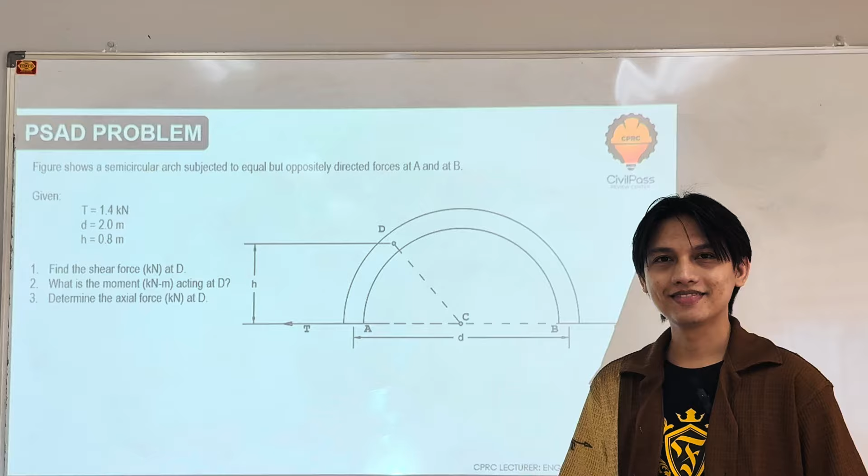PSAD naman. So, meron tayo ditong problem. I-solve ko muna to using the conventional and then sa huli, solve ko ng shortcut. So, hintayin nyo. Okay? So, basahin natin.

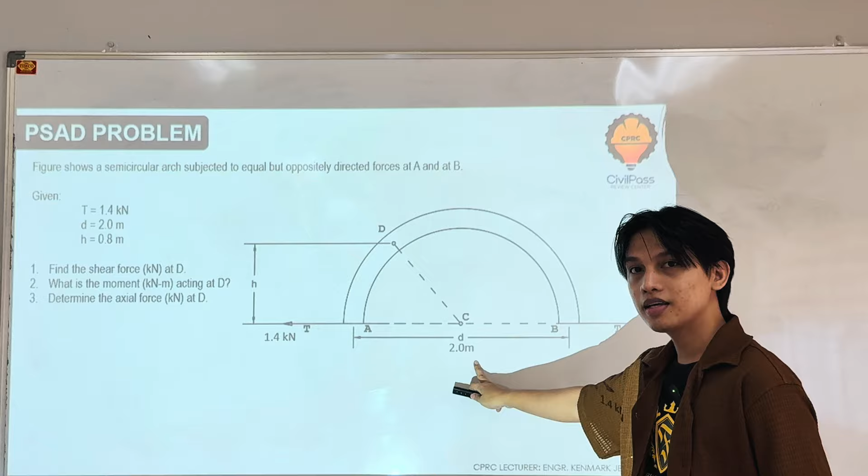May circular arc daw tayo which is subjected to equal but opposite force at point A and B. And given yung value ng force na yon, 1.4. Given din sa atin yung diameter ng ating semicircle, ilapag natin. Then given din tayo ng h, which is this one. And kung babasahin natin yung mga tanong, hinahanap sa atin yung shear force, moment, and axial at point D.

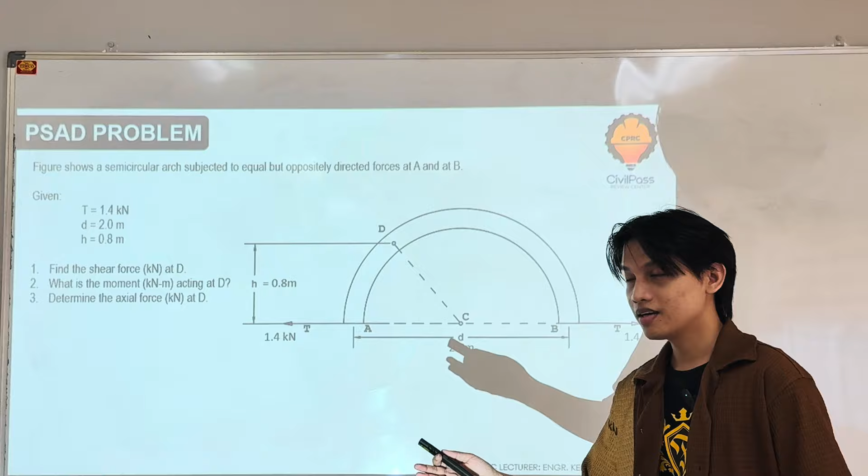So ito yung point D, ano? Ngayon, paano natin isosolve yan? So, these are internal forces. Para ma-solve natin yung internal forces, una natin kailangan gawin is palabasin yung mga internal forces na yan. Okay, kasi initially, hindi natin nakikita yung mga yan dito, no? So, para palabasin yan, we need to cut.

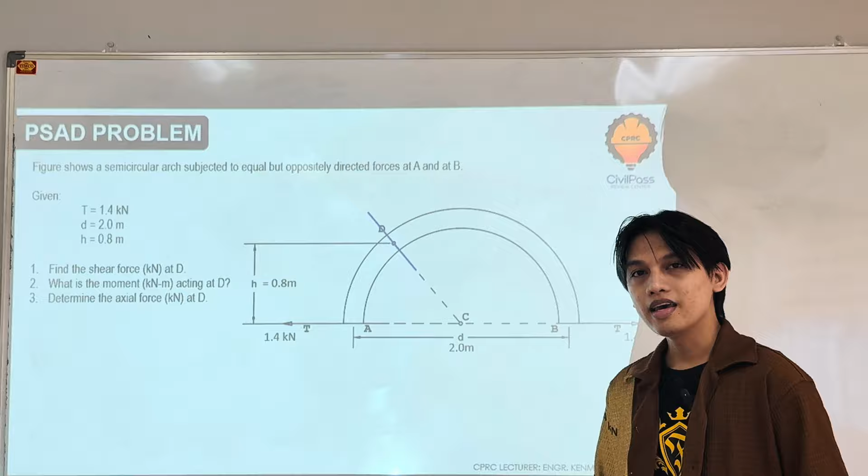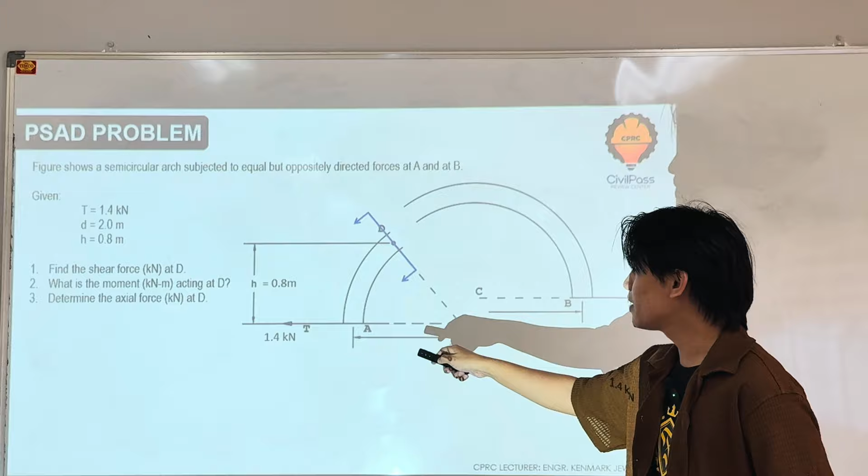Okay? So, we are going to cut at point D and tandaan, kapag nagka-cut tayo, dapat parallel doon sa cross-section. Parang ganyan. Okay? And then, dahil kinat natin yan, mahati yan into left and right part. Then, pipili na lang tayo dito kung ano yung magandang i-analyze. In this case, i-analyze ko na lang itong left part kasi mas mukha siyang simple and kompleto yung data niya compared sa right side. Okay, so focus tayo dito.

Ngayon, dahil nag-cut tayo, merong lalabas na internal forces dyan. Okay? And para ma-drawing yon, gawa tayo ng free body diagram. And take note, when we do the free body diagram, may dalawang way yan. It's either the method of assumption or method of correct sense. When we say method of assumption, ang gagawin mo dyan is mag-assume ka lang ng direction ng forces. Pero para sa akin, mas maganda yung method of correct sense. Basically, ang gagawin natin is kapag i-drawing natin yung forces, magbabase na lang tayo sa given na loading and magsasagawa tayo ng educated guess. So example, ganito.

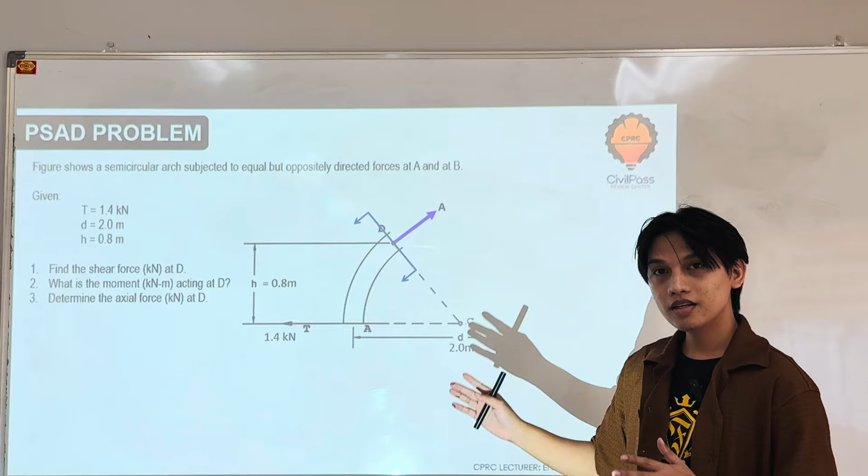So simulan natin sa axial. And tandaan natin, ang axial dapat perpendicular siya sa cross-section. And then, idrinowing ko siya na papunta sa labas kasi yung external force natin is going to the left. Dapat may kumontra dyan to maintain equilibrium. So, ang kukontra dyan is yung horizontal component nito to the right. Pag drinowing kasi natin yan na papunta sa ating cross-section, ang magiging component na yan would be to the left. Which is hindi niya nakukontrahin yun. No? I hope na-gets nyo yun.

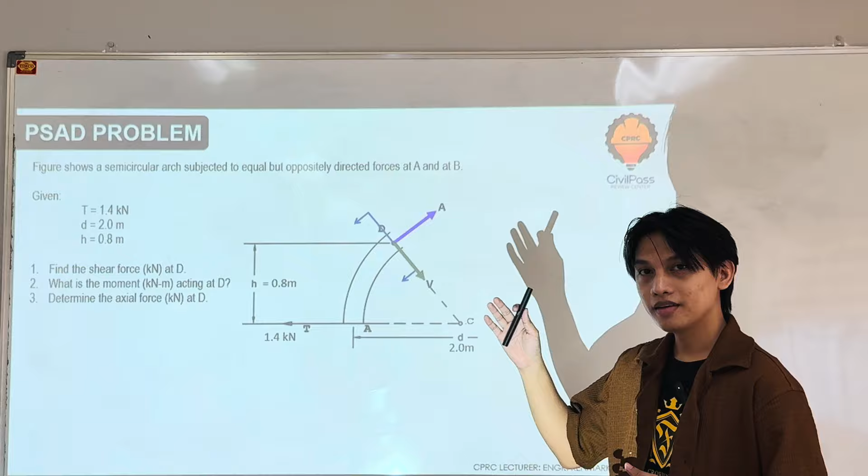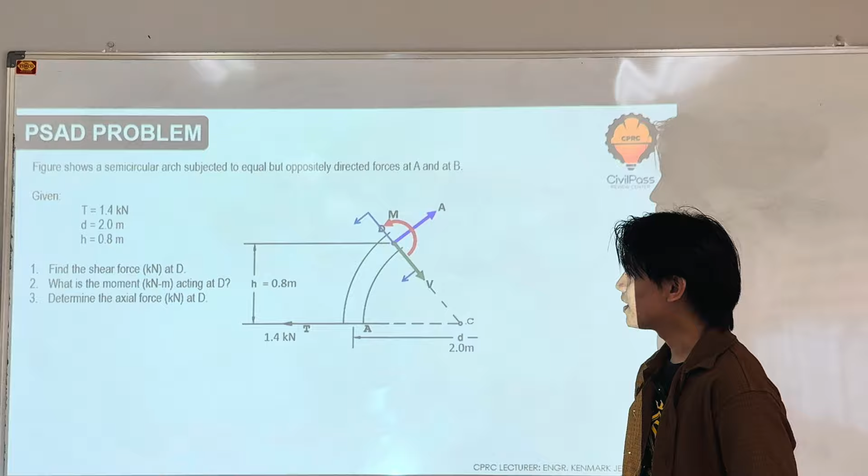Next naman, yung shear. And tandaan, pag i-drawing natin yung shear, dapat parallel siya sa cross-section. So, ang itsura niyan ay paganyan. I-drawing ko siya na pababa para yung horizontal component niya, kukontrahin din ito. Okay? And then lastly, yung moment. Based on our analysis, about point D, itong 1.4, iikot in a clockwise manner. So, kontrahin natin yan using a counterclockwise moment. Yan. And then, possible magkaroon dito ng torsion, pero para sa ganitong case, hindi na ito magkakaroon ng torsion. Yan. So, tatlo lang yung lumabas. Let us now solve this.

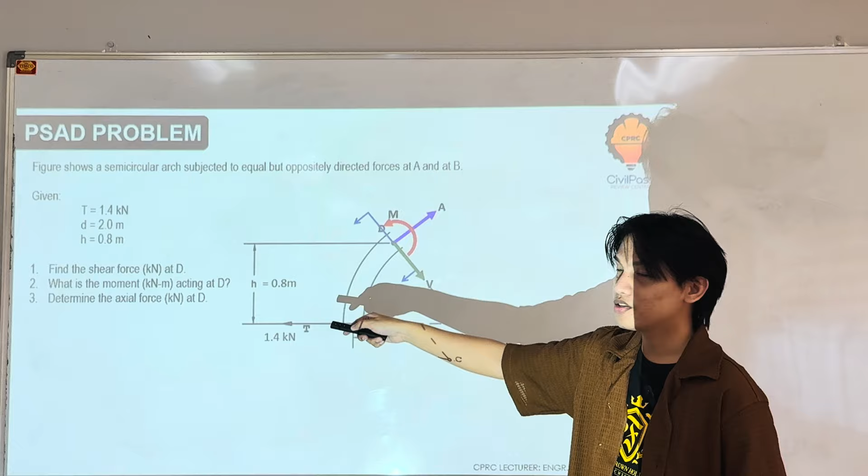Tapos na tayo sa equilibrium, tapos na tayo sa free body diagram, pwede na tayo mag-perform ng equilibrium. Now, dahil hinahanap sa atin itong tatlong ito, okay lang kahit na hindi na natin unahin si shear force. Unahin na lang natin yung mas madaling isolve dito sa tatlo. Okay? So sa tingin nyo, alin dito sa tatlo yung madaling isolve? Okay? So sa tingin ko, ang madaling isolve dito ay yung moment. Bakit? Kasi naiisip ko, pag ako ay nag-summation of moment dito, matatanggal itong dalawang unknown. Diba? So, ang unknown na lang is si moment. So, pwede na akong mag-moment doon.

So, let's do that. Summation of moments sa D. Consider natin na clockwise positive. So, we have, nahin natin si force. So, 1.4, ang moment arm niyan is the distance that passes through this point and dapat perpendicular sa kanya. So, ito yon, no? And, iikot yan in a clockwise manner. So, positive tayo. Moment arm niya is yon, 1.8. 0.8, no? And then lastly, itong moment na lang, which is a counterclockwise moment, so negative. Wala nang iba, equal to 0. Shift solve, and that is our answer. Positive ang lumabas, ibig sabihin, tama yung analysis natin ng direction niya.

Okay? Next. So, sunod natin itong dalawa. Alin dyan sa dalawa yung tingin yung mas mabilis makuha? So, sa tingin ko, ang mabilis makuha dito is yung axial. Bakit? Kasi naisip ko, kapag ako ay nag-moment dito sa C, ang mangyayari, mawawala itong shear force kasi dadaan sa moment center, and bonus, mawawala din ito, no? Kasi dadaan sa moment center natin. Ang mag-moment na lang dyan is yung axial, which is, dahil perpendicular siya sa section na to, it is already perpendicular sa moment arm na ito rin. Okay, tama?

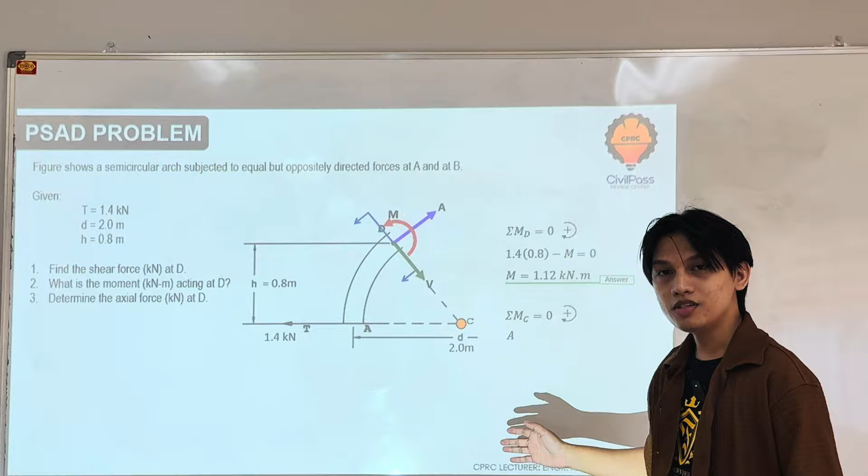So, let's do that. Summation of moments sa C, considering clockwise positive. So, unahin natin si axial, ano? So, axial, ang moment arm nito ay ito, which is just the radius ng semicircle. If the diameter is 2, then the radius is 1. Ayan. Okay? And ang kinagandahan, perpendicular na, no? So, yan yung moment arm niya. Iikot yan in a clockwise manner, so positive siya.

Next, yung M. Counterclockwise, so negative. And actually, alam na natin yung value niyan, no? Equal to 0, shift solve tayo, and sagot na agad. Okay, so simple lang, no? Positive lumabas, tama ulit yung analysis natin ng direction. Okay? So next, yung shear force.

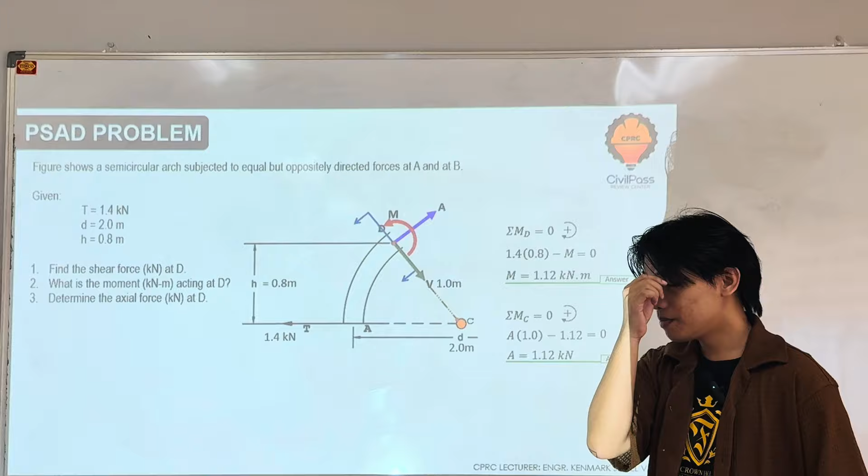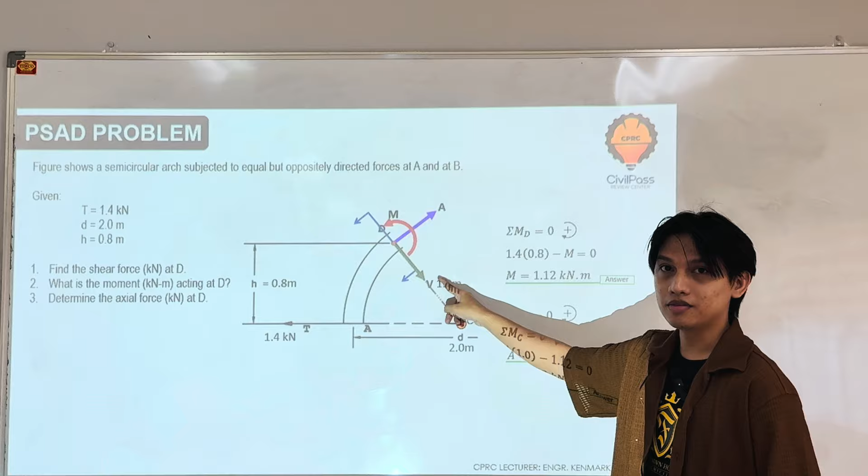So ito medyo tricky na kung paano i-solve si shear force. Pero kung isipin natin mabuti, may 3 or 4 na possible way to solve this. So bilisan ko na lang ano. So isang possible way is, gawin natin, dapat siya lang yung maging unknown. So isa sa naisip kong way dito is to extend the line of action ni point A hanggang ma-meet natin yung point na yon, tawagin natin point O. And then naisip ko, kapag nag-summation moment tayo dyan sa point O, mawawala si axial, mawawala si tension, ang iikot na lang dyan is si shear force at saka si moment. Which is, alam na natin ito, so shear force na lang unknown. Di ba? So solvable siya.

Kaso may problema, unknown yung distance din na ito. Pero madali lang makuha yan kasi alam naman natin na perpendicular to. So itong triangle na to is a right triangle. So kailangan na lang natin makuha yung theta rito or doon. And ang gawin natin ay tangent of theta is equal to opposite over the adjacent. Makukuha natin si D. Kaso problema ulit, hindi natin alam ito, no? Madali lang din makuha yan. Kung nakikita nyo itong triangle na to, this is a right triangle, so pwede natin gawin is sine of theta is equal to opposite over the hypotenuse. Shift solve tayo, makuha natin si angle. So once makuha mo si angle, kunin mo si D, then mag-moment ka sa O. That is one way, no?

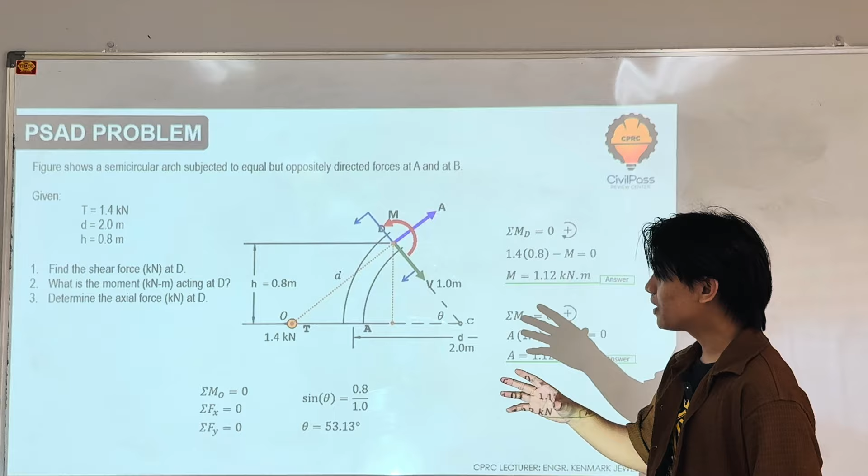Another way is mag-summation of forces horizontal ka na lang. Kasi kung papansinin mo, ang unknown na lang ay ito. So, yung mga forces, pag nag-summation force horizontal ka, is yung tension, yung horizontal component ni axial, and yung horizontal component ni shear. So, solvable si shear. Another way is mag-summation forces vertical tayo. Diba? And ang gawin na lang natin, i-component natin si axial, tsaka si shear, and then, makuha na natin si shear. So, doon sa tatlo, mas mabilis si summation forces vertical, no?

So, let's do that. So, summation forces vertical, considering upward positive, we have, unahin natin si axial. Pero para makomponent natin si axial, we need the angle here. No? So, para makuha itong angle na to, nakikita ko rito, given na yung angle theta na to, dahil horizontal ito, horizontal, pass through by a line. So, if this is theta, this is also theta. Diba? And if this is 90 degrees, then this is 90 minus theta. So, may theta na tayo. So, alam na natin itong angle na to.

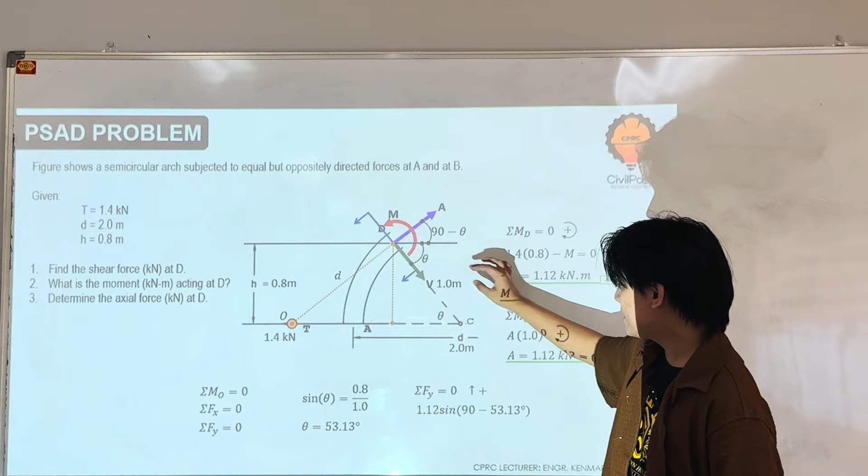So, let us start. So, para makuha yung vertical component ni A, that is just equal to axial sine of 90 minus theta. Positive kasi upward. Next, kunin naman natin yung vertical component nito, no? That would be downward, no? So, V sine theta. Negative kasi downward. Wala nang iba, equal to 0, shift solve, yan na yung sagot. Okay? So, napakasimple, ganyan yung conventional way natin.

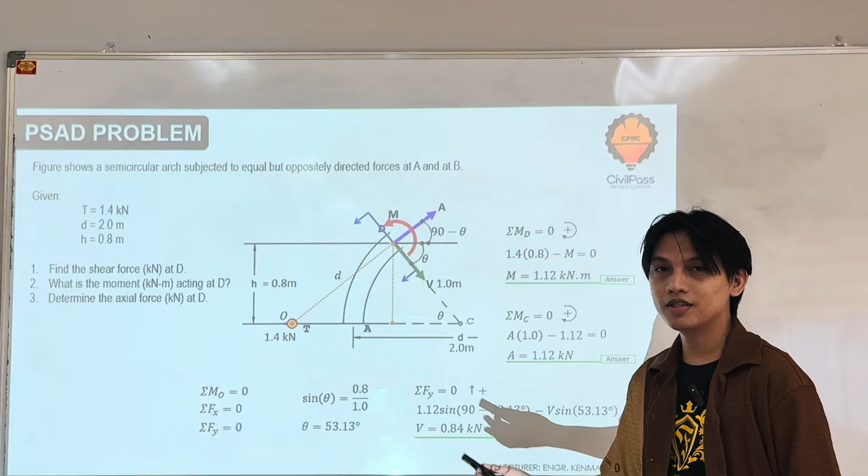Pero kapag andito ka pa, turo ko sa iyo yung shortcut. Okay? So, the shortcut, it's like this, no? So, tandaan natin na para maging under equilibrium itong system na to, if meron tayong to the left na 1.4, dapat yung force dito at point B should be a force that is opposite in direction, pero parehas yung magnitude. As you can see, magka-cancel out sila, no? So this would now be in equilibrium.

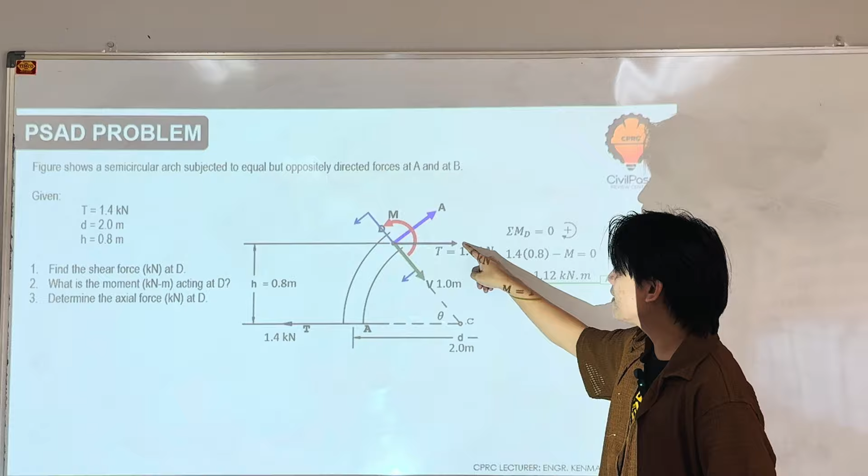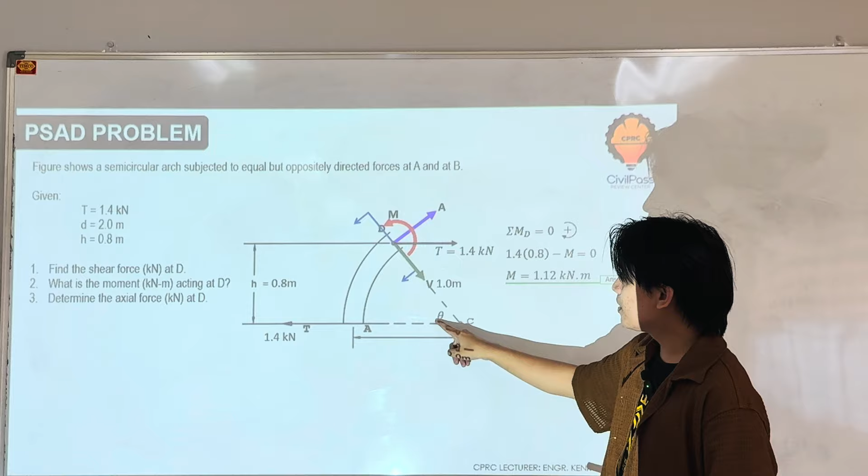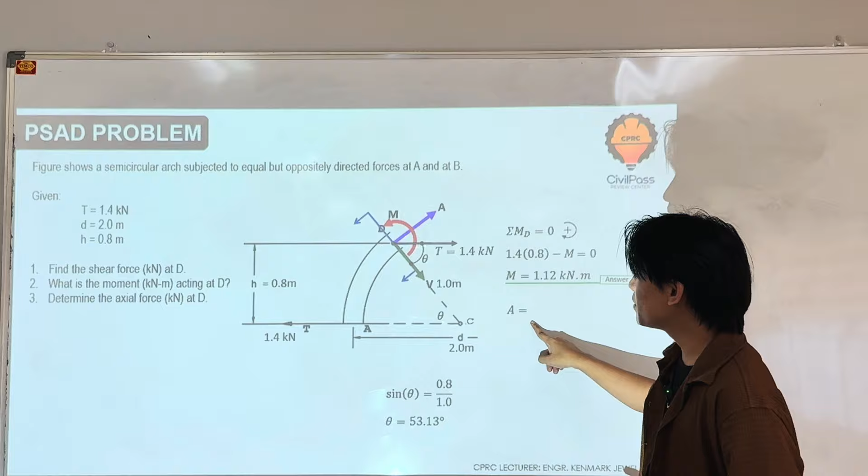So ang gagawin natin to solve for axial and shear is kunin lang yung component nitong force na to with respect to the axial and shear axis. Yun lang gagawin natin. So, kailangan lang natin ng angle dito or dito. Anyway, alam naman na natin yung value ng angle dito, no? That is just equal to 53.13 degrees. Okay? So, simulan natin sa pagkuha ng axial. Tignan nyo, ha? So, that would just be equal to T sine of theta. Calculate. Para naman sa shear force natin, that would just be equal to T, then cosine theta. Calculate, and yun na. Okay? So, mas mabilis siya, no? Napabilis natin dahil alam natin yung concept ng equilibrium.

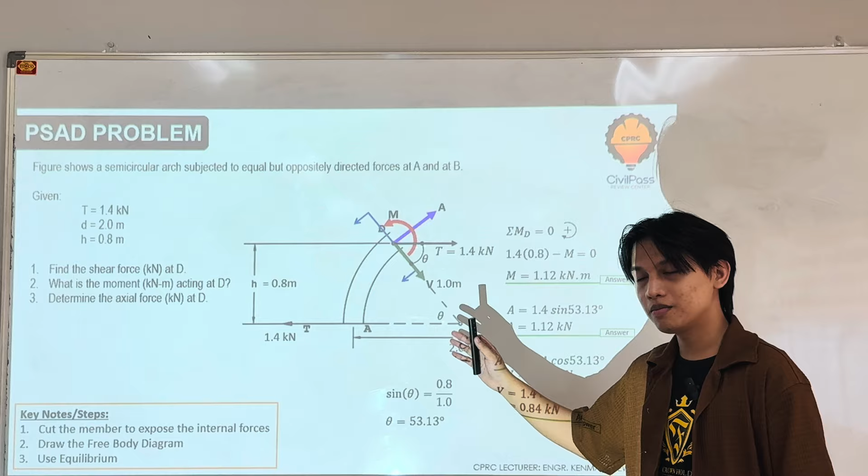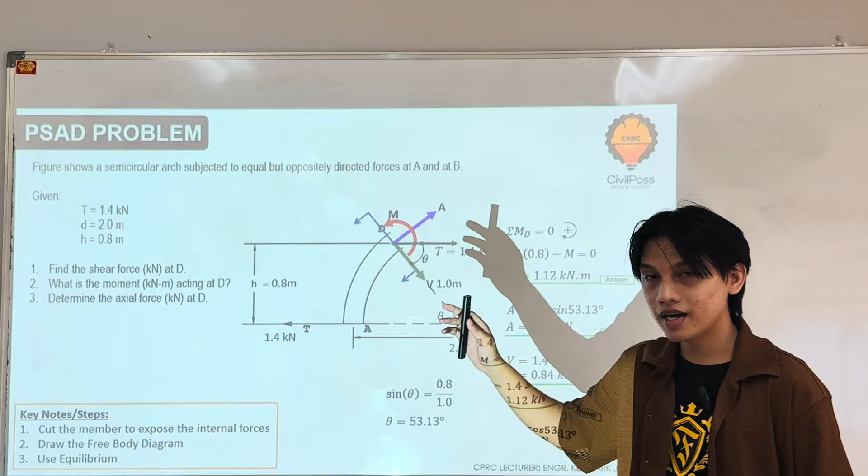Yan. So, in summary, ganito yung ginawa natin, guys, to solve this. Unang ginawa is to cut the member to expose the internal forces. Pero, syempre, hindi naman lalabas yan mag-isa, no? You need to draw. So, gagawa tayo ng free body diagram katulad ng ginawa natin. And then, once na magawa mo yan, pwede ka na mag-perform ng equilibrium to solve each of the internal forces.